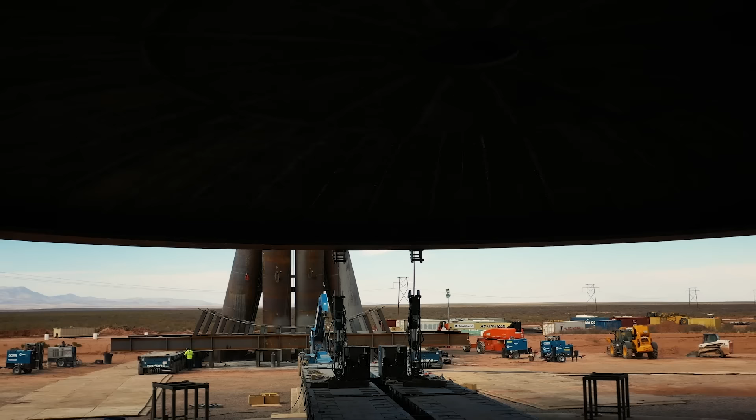In the middle of a global pandemic, a ragtag group of welders, heavy machine operators, and builders were brought together. They were given plans for a mysterious structure. With little information on what exactly they were building, their only clue was scrawled across the top of their plans: SpinLaunch, a space catapult. In this exclusive, behind-the-scenes documentary, I talked to the people behind this new innovative company.

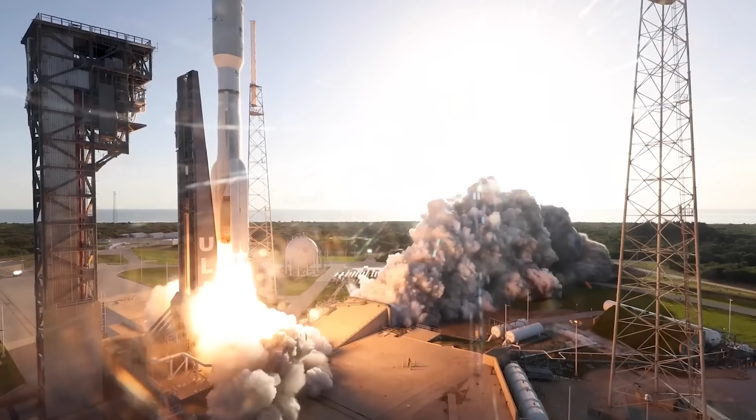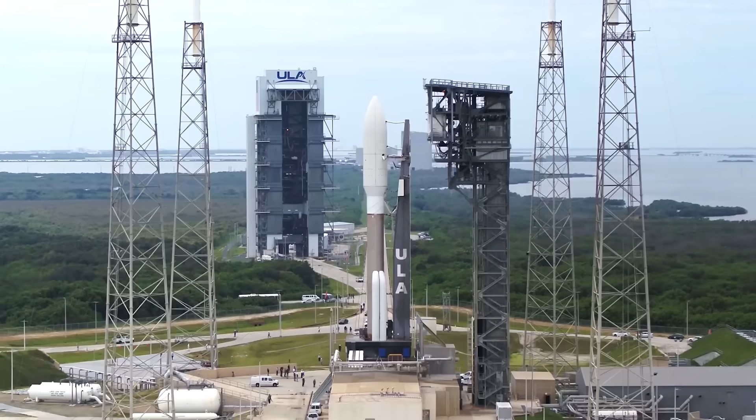SpinLaunch is attempting to subvert a problem that plagues the space industry: the rocket equation. The rocket equation has been the tyrant engineers have feuded with from the dawn of the space age, a simple equation that describes how much fuel a rocket needs to carry a payload to its destination. The tyranny of this equation is that the fuel needed to deliver that payload is a payload itself, a compounding problem that makes rockets more fuel than rocket. Typical rockets are more than 90% fuel.

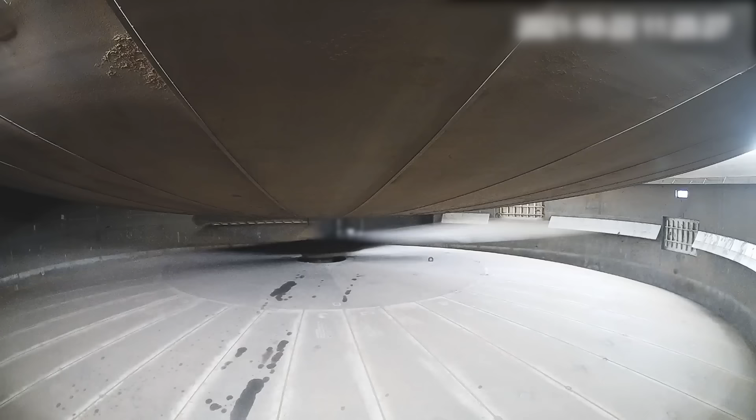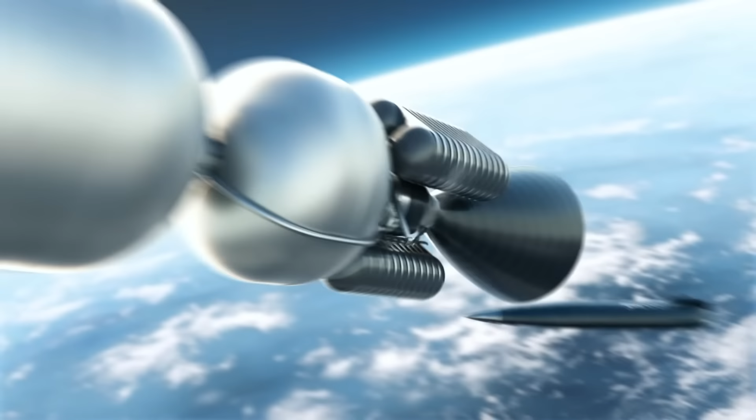SpinLaunch is trying to change that paradigm by imparting as much velocity as possible to the payload on the ground, eliminating as much fuel as possible from the rocket's weight, while greatly reducing the size and complexity of the non-reusable components. Their plan: to spin a small rocket in a centrifugal mass accelerator under a vacuum up to an astonishing speed before releasing it, punching through the thickest layers of our atmosphere at hypersonic speeds, gaining 61 kilometers of altitude off nothing but pure kinetic energy, before splitting its fairings and unveiling a substantially miniaturized two-stage rocket to continue its journey into orbit. You may question the numbers here, but this isn't the first time this has been done.

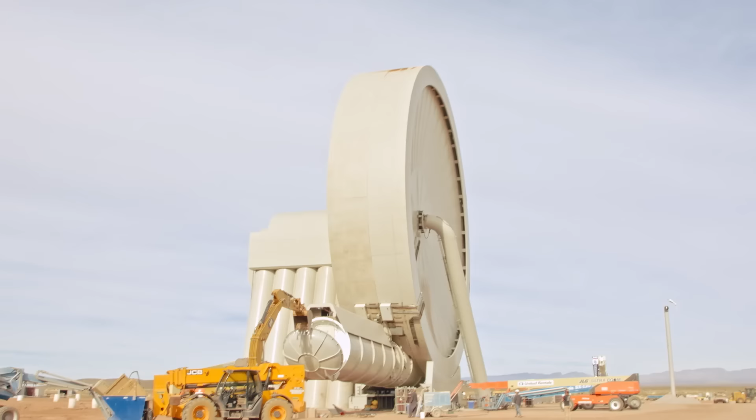Project HARP, standing for High Altitude Research Project, managed to get a projectile to 180 kilometers of altitude with a high-powered gun. They achieved a muzzle velocity nearly identical to SpinLaunch's planned launch velocity. However, scaling a kinetic energy launch system up to launch a 10-ton projectile needs SpinLaunch's technology.

Of course, all of this is easier said than done. The challenge facing SpinLaunch's engineers is immense. This endeavor demands several new key enabling technologies.

So in terms of key enabling technologies, carbon fiber certainly takes center stage. That's David Wrenn, SpinLaunch's VP of Technology. I spoke with him on the SpinLaunch factory floor about the carbon fiber reinforced plastic that they are using for their tether. In terms of its strength to weight ratio, it's essentially unmatched by any other material on Earth. And the amazing thing is that it's actually available in industrial quantities now, and the engineering tools and simulation methods exist to really quickly iterate and understand what a composite structure will do. And then we have structures and test rigs like this to validate in the real world that the components actually fail at the expected loads.

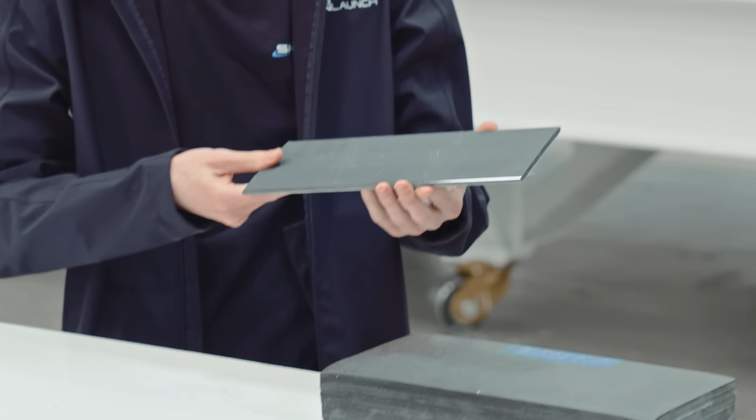So just to give you a sense of the strength of carbon fiber, this is a pultrusion. This is made by taking carbon fiber tow, essentially spools of carbon fiber, and pulling it through a heated die with a resin bath. Basically, the resin gets impregnated into the carbon fiber tow as it gets pulled through the heated die. And you get these really nice, highly unidirectional structures that can be used for spin launch. And so as small as this cross section is, I think this is about 1/8 of an inch thick and only a few inches wide. This can do just under 250,000 pounds of total load capacity, which is really, really impressive.

I'm trying to convert it to metric in my head. It's like, oh yeah, no, that's a lot. Yeah, I think it's like 1,000,000 newtons or something like that. So, and then if you look at, this is where it gets interesting: can you build really thick cross sections of carbon fiber? You can see there's really great—

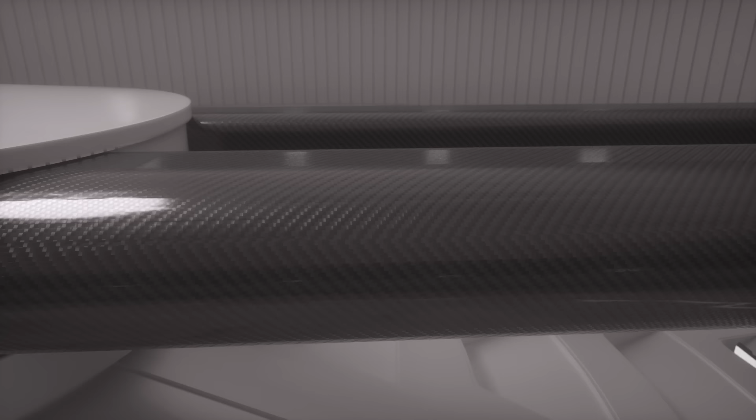Is this pultruded as well? So this is not pultruded. This is laid up and then it's cured in an autoclave. So this is essentially a subsection of the laminate that you would see at the root of the tether on the suborbital system. So this is not unidirectional or pultruded. But if you were to take this same cross section here and basically make this a pultruded fiber, if you just stack up multiple pultruded sections, you would get about 9 million pounds of total load capacity through this cross section. So it's impressively strong for what it is.

I mean, it's heavier than you'd expect. Like holding a carbon fiber brick. I don't think I've ever seen an application where that much carbon fiber has been laid up. It's rare to see carbon fiber this thick. Yeah, it really is rare.

The final fully scaled tether for SpinLaunch's orbital system is likely going to be the single strongest tensile structure on Earth. Let's do the math on that. SpinLaunch aims to yeet its aeroshell containing the miniaturized rocket system at about Mach 6. That's roughly 2 kilometers per second.

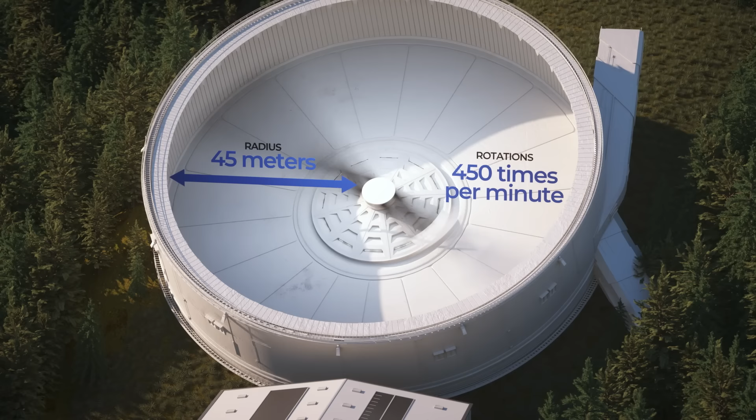With a radius of 45 meters, the tether will need to spin 450 times per minute to attain that velocity. At that rate, the G-loading on the tether will be 10,000 Gs, meaning this aeroshell is going to exert a force 10,000 times greater than its weight due to gravity.

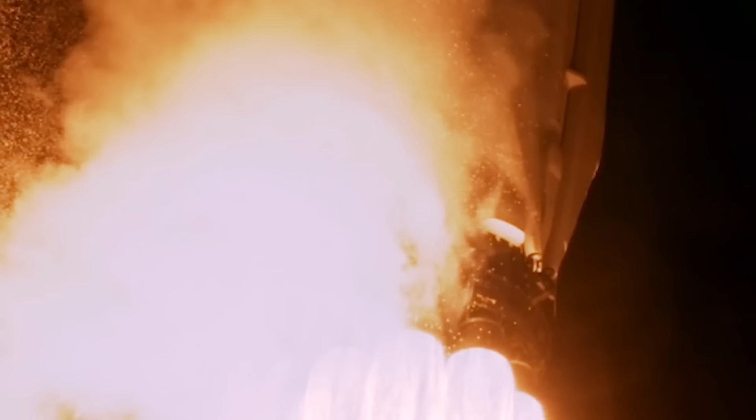The aeroshell with the payload and rocket is going to weigh approximately 10 metric tons. So that means the tether at the tip needs to support 100,000 metric tons, or 100 million kilograms. To put that in context, a fully loaded Falcon 9 weighs about 0.55 million kilograms, so this tether needs to support the equivalent weight of 182 Falcon 9s.

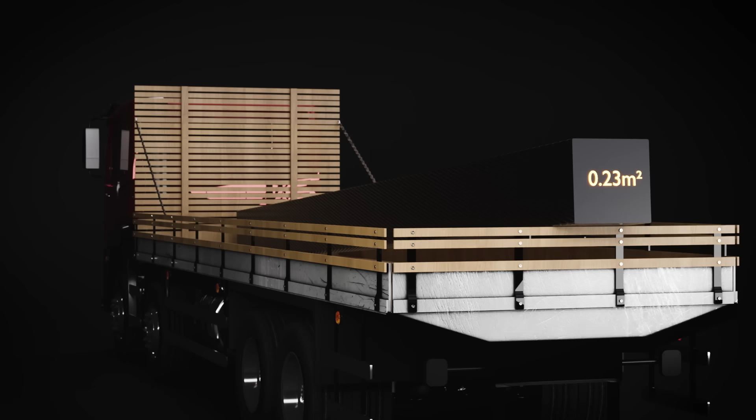This requires a hefty piece of carbon composite with a cross-sectional area of at least 0.23 meters squared. That explains the brick of carbon fiber we saw. That brick could support 4.1 million kilograms, so the full-scale tether will need to be 24.4 times this size at its tip, but that's just the tip.

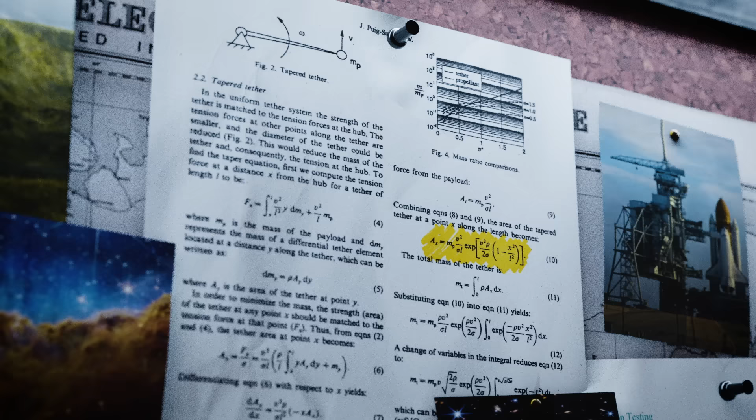This equation tells us why carbon fiber is so vital to this endeavor, because each section of the tether has to support the section above it. Its strength-to-weight ratio needs to be exceptional.

If we calculate the tether area near the hub for the same carbon composite, the tether only needs to increase in area by 2.5 times, to about 0.56 meters squared. We would, of course, need to add a safety factor of at least 1.5, increasing these dimensions by 50%.

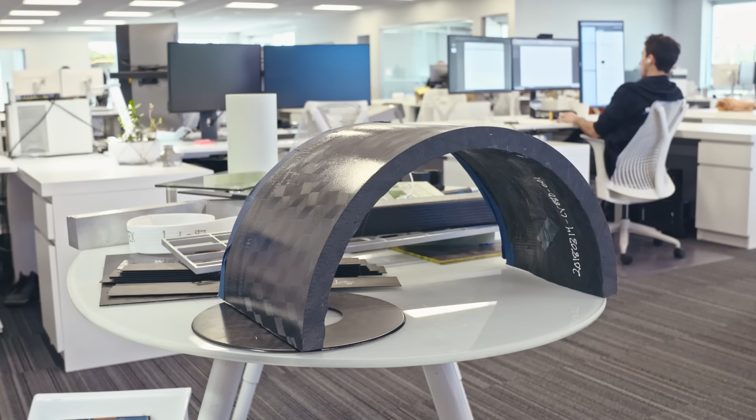That design is perfectly feasible and is reflected in SpinLaunch's renders. We even have the manufacturing skills necessary to build even larger composite structures thanks to the wind industry.

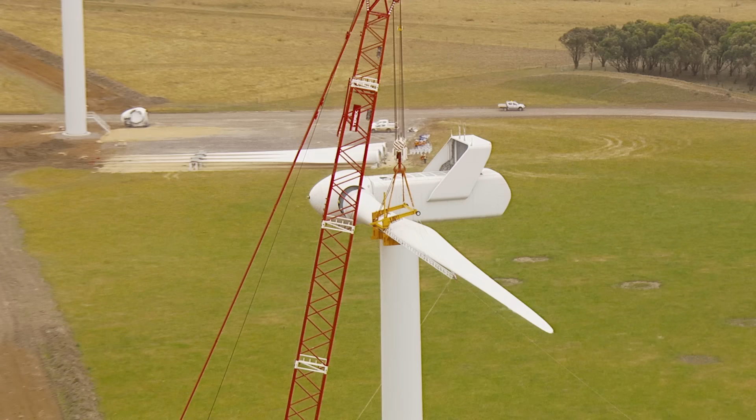So, this is all well and good, but spinning a carbon fiber composite up to Mach 6 isn't possible in air. The aerodynamic heating would destroy it. So, to solve this issue, SpinLaunch created a massive vacuum chamber around its tether.

There's a bunch of things at the beginning of SpinLaunch that were non-starters for a lot of people, like even just building the large diameter vacuum chamber. People were telling us the one behind me here would cost tens of millions of dollars to build, and we ended up doing it. We had this really scrappy, lean mindset, and we ended up doing it for less than a couple million dollars with about 10 people.

Which is unheard of. There's some large industrial vacuum chambers out there, but quite a few of the really large chambers in the world are for aerospace applications, and so they're achieving extremely high levels of not only vacuum but cleanliness. The cost is proportional to that, and it's kind of exponential.

They're achieving vacuums that are on the order of 10 to the negative 8 millibar or torr. Typically we're operating at about 1 million times worse than that. SpinLaunch is breaking new ground with this kind of vacuum chamber.

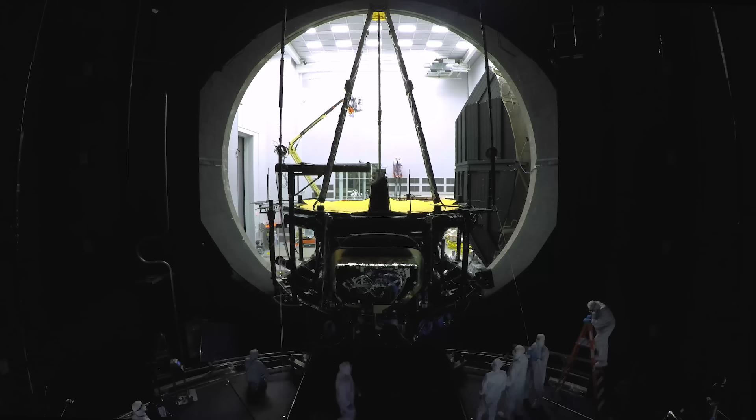Typical large volume vacuum chambers, like the world's largest one at Space Power Facility in Sandusky, Ohio, are designed to simulate the vacuum of space. Those require an extremely low pressure vacuum with tight tolerances and control of contamination. They even need specialized tools like lamps to simulate the radiation and heat emanating from the sun, and cryogenic cooling to simulate the cold of space.

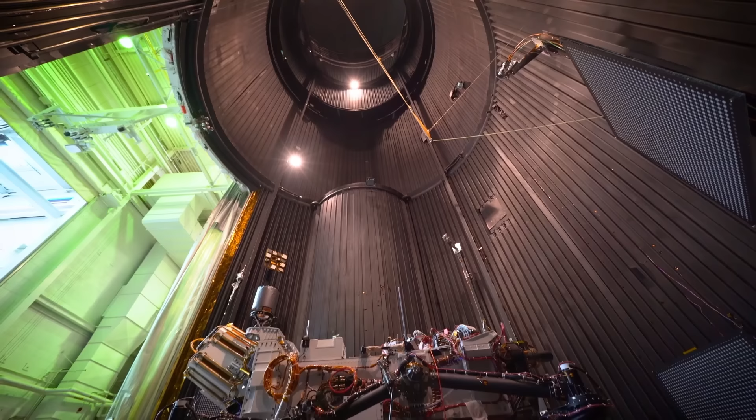The people that built these facilities are the industrial experts SpinLaunch had to draw from, and most thought they would never be able to build a vacuum chamber this large on their budget. But SpinLaunch does have some things on their side.

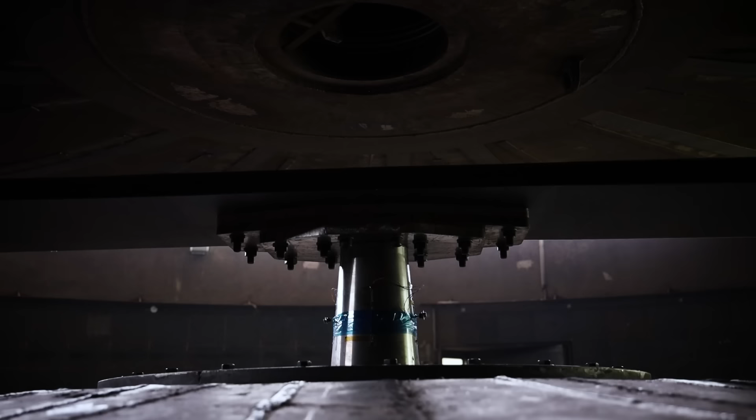They didn't need that extreme of a vacuum, as their goal is not to simulate the vacuum of space. Their goal is to minimize drag and the power required to overcome it, minimize the aerodynamic heating that would destroy the tether, and eliminate all those pesky aerodynamic effects like flutter.

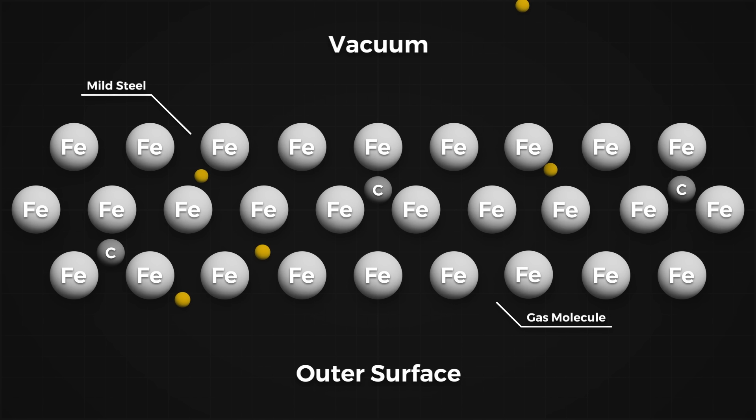That means SpinLaunch could use cheaper materials like mild steel, where ultra-high vacuum chambers need more expensive specialized processed materials to avoid outgassing, where gases within the metal in the form of oxides or simply dissolved within the metal are released into the vacuum. It also makes the process of drawing a vacuum much easier.

Drawing a vacuum isn't as simple as just turning on a pump and leaving it on long enough. The more air you draw out, the harder it becomes, as you are not only working against a continually growing pressure gradient, but statistical probability.

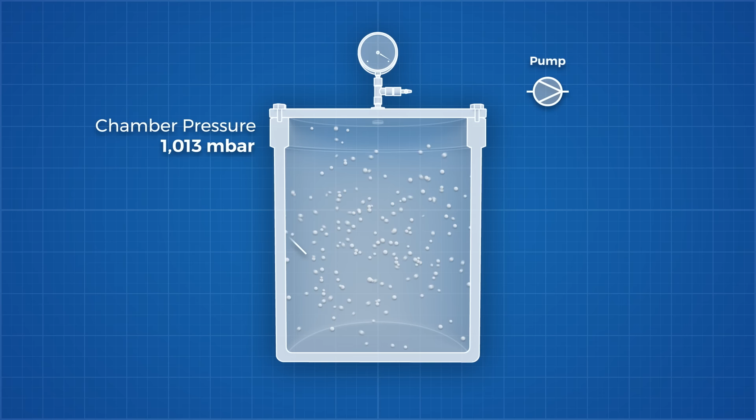The first stage of drawing a vacuum is to remove the bulk gas. At this stage, the gas is a viscous fluid, and the molecules within the chamber interact with each other often.

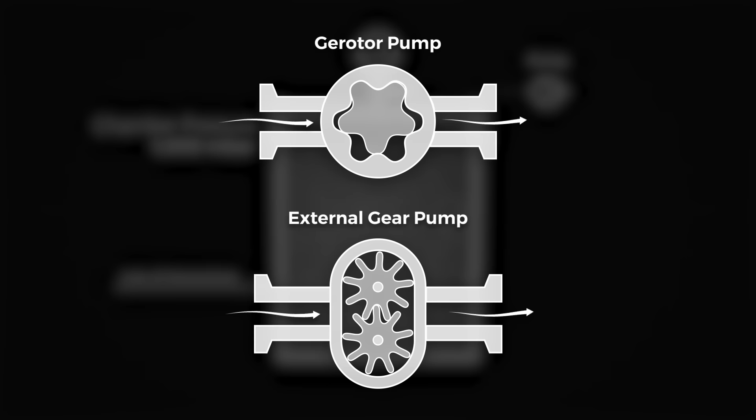We can use traditional fluid flow pumps, like a positive displacement pump, that mechanically move molecules out of the chamber, and higher pressure air at the back forces more air to fill the space created, allowing more to be pumped out. But as gas is removed, the distance between molecules increases. This is called the mean free path, the distance a molecule can travel without colliding with another.

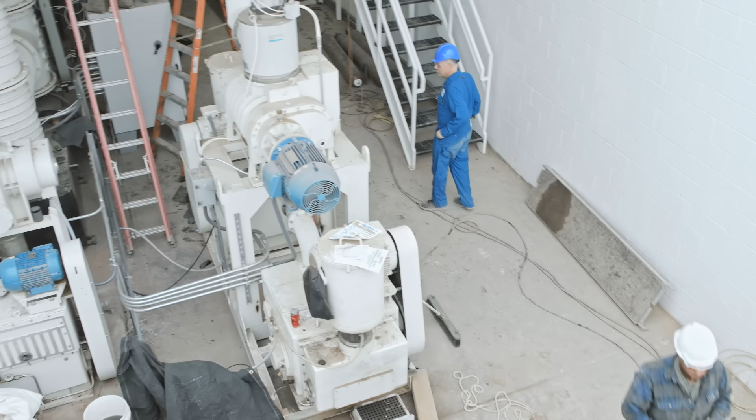Pressure is really just molecules colliding, and as collisions become more infrequent, the pressure gradients needed to achieve equilibrium begin to vanish. It takes longer and longer for equilibrium to be established, and the rate the pump can remove molecules lowers, as there are simply fewer and fewer molecules near the pump to remove.

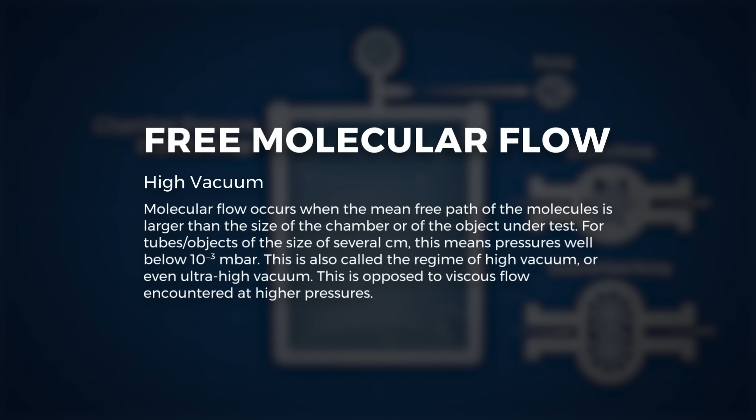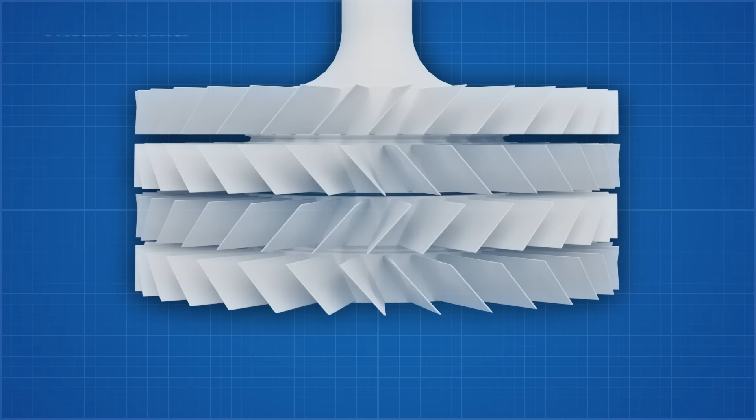At some point, viscous flow stops entirely, and we enter a flow regime called molecular flow, where the distance between collisions is larger than the internal dimensions of the vacuum chamber, meaning molecules are statistically more likely to just bounce around inside with nothing forcing them towards the exit. At this stage, it's impossible to actively pump molecules out. The pumps needed act like a Venus flytrap, waiting for a molecule to enter, then preventing it from returning to the original chamber.

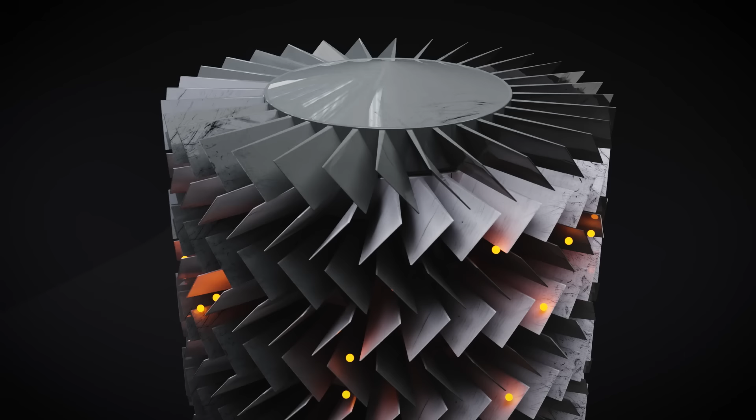Turbomolecular pumps are basically multiple levels of turbines that knock molecules in one direction and prevent them from traveling backwards. These pumps require insane rotation speeds, anywhere from 36,000 RPM to 72,000 RPM, and need incredibly tight tolerances too. They are trying to pump individual molecules after all, so these kinds of pumps are expensive.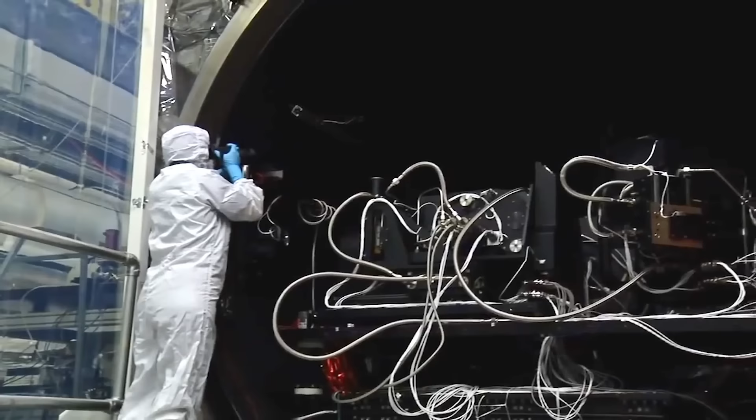All the while, outgassing and other leaks are actively working against a game of pure chance. Creating a high vacuum requires extreme precision in manufacturing and design.

SpinLaunch didn't need any of this. Mark Sipperly, the director of engineering at SpinLaunch, walked me through the vacuum pump station at the New Mexico site.

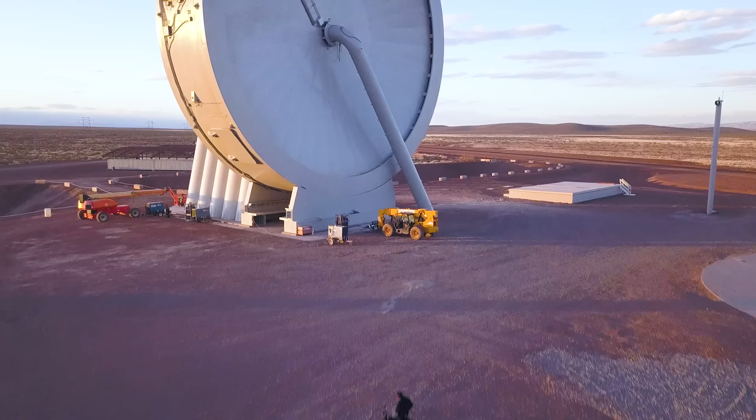Here in the vacuum plant, the most familiar thing would be the tube that came out of the chamber and then runs underground—this is the manifold. So this is the very end of it. Off of this vacuum manifold, we then have a series of 3 different types of pumps.

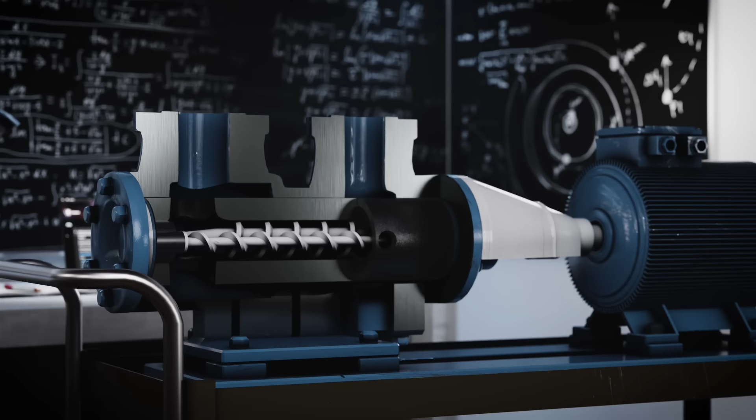Up on top, we first have roughing pumps, which pull the atmosphere from 1 atmosphere down to about 30 millibar. Those are dry screw pumps. They're essentially like overlapping lobes—it's one form of a supercharger.

Then the next stage is this roots pump, which is like another shape of a supercharger—rotating twin screw pumps. That kicks on at about 30 millibar, so it's mostly only effective at 30 millibar and below. But each pump exhausts into a pump that's a slightly higher pressure. So this roots pump only works at 30 millibar and below, but it can't exhaust all the way out to 1 atmosphere, so it's backed by another piston pump.

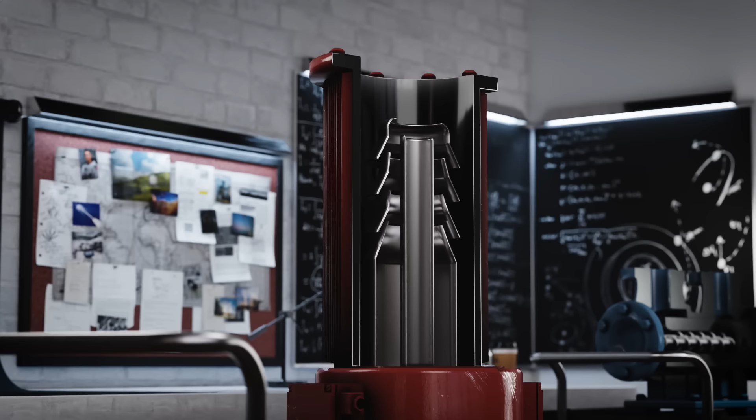Once we get down below 1 millibar, we turn on these vapor diffusion pumps, which are really only effective at very low pressure—those work like oil jets. You vaporize oil, shoot it down a series of channels, and it grabs onto the air molecules, runs them down a series of tubes, and then you have cooling loops that condense out the oil. The air progressively makes its way through a long path, and eventually gets to a roots pump, which grabs onto it, then goes to a piston pump, and then all the way out.

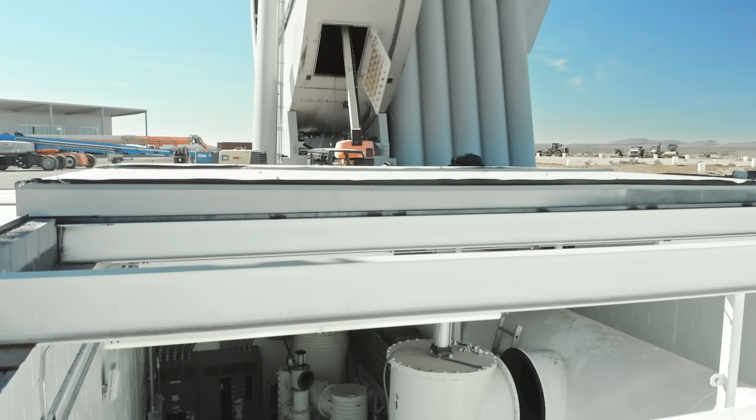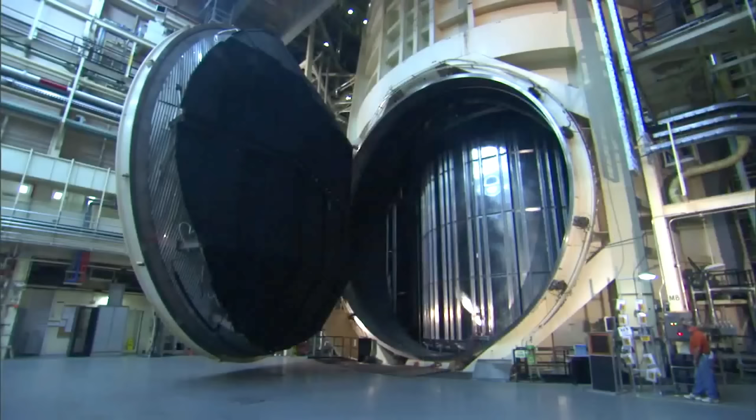We talked before about how vacuum may not be the best description, because most people think of vacuum as a hard vacuum, in torr, like e to the -7 torr—6 zeros and then the number. That's true vacuum, that's hard vacuum, that's where you test electrical propulsion systems and high-end space features.

That is nowhere near the atmosphere that we need, and that vacuum is really expensive to get to, and you have to follow a lot of stringent rules—you can't use steels, you have to use aluminums or thin coatings. Even putting your fingerprint in a vacuum that low would take weeks to boil off.

We only require the equivalent of like e to the -3 torr, so 0.01 millibar or 0.1 millibar. Today we're going to be running it at like 1 millibar because we only pull the vacuum that we need, because vacuum is expensive. It's closer to describe it as a low atmospheric chamber than a vacuum chamber specifically.

This is another one of those technical issues that the internet made a big deal out of without fully understanding what SpinLaunch actually needed out of the vacuum chamber.

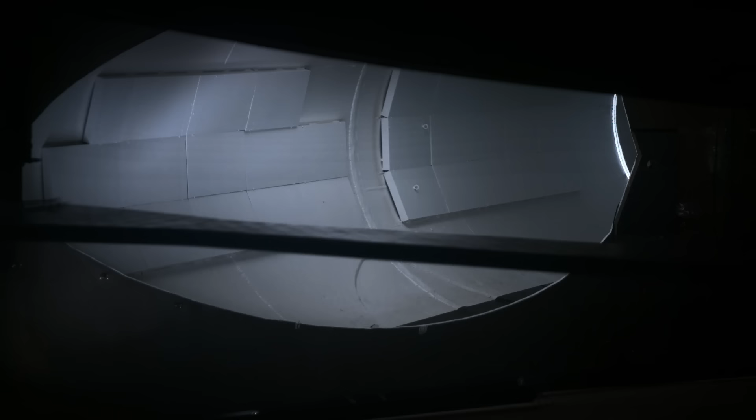One of the other primary concerns expressed on the internet was the tricky and unique problem of a vehicle traveling at hypersonic speeds from a vacuum into a thick sea-level atmosphere. To begin with, we need to prevent air from rushing into the vacuum chamber once the vehicle is released. SpinLaunch is aiming to be a high-frequency launch system, capable of launching multiple satellites per day, holding the vacuum between launches to decrease energy and time costs. However, the primary concern is the disastrous effects that air would have as it meets the tether spinning at hypersonic speeds.

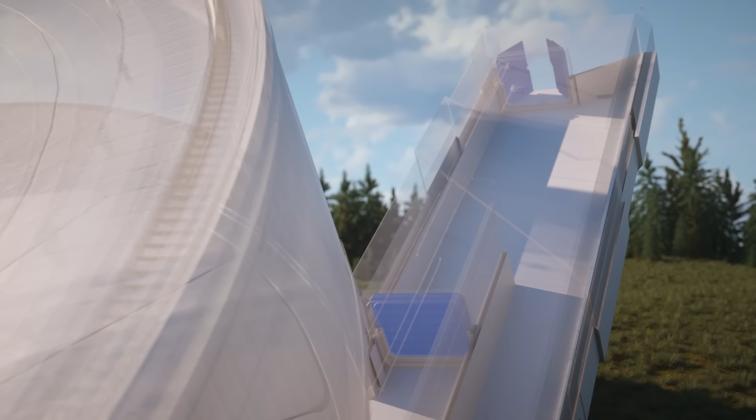This would be an incredibly expensive single-shot system if this was allowed to happen. To solve this problem, SpinLaunch needed a way of sealing the chamber extremely quickly after launch. Inside this long tube attached to the vacuum chamber is a double-door airlock with doors on either end of the tube. This tube is also under vacuum during spin-up. As the vehicle is released, using a release mechanism that SpinLaunch kept hidden from our cameras throughout the shoot, it passes into the exit tunnel, where the first door rapidly closes behind it. As this first door is closing, the second door will begin to open. The atmosphere will begin rushing into the tube and give the Aeroshell its first taste of the hypersonic flight regime it will be flying in.

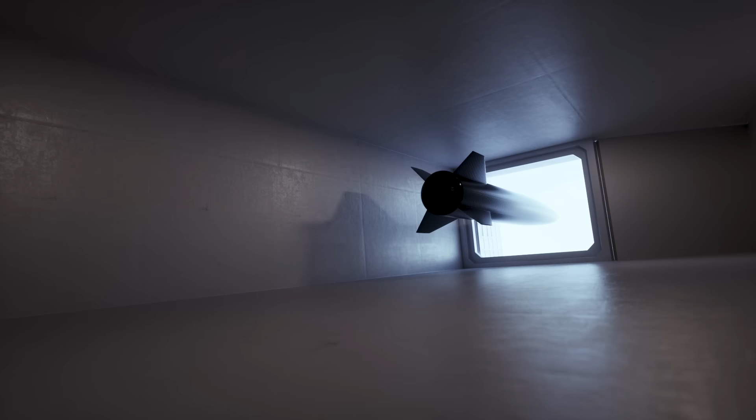The first and second door need to close quickly enough to prevent air from entering the vacuum chamber. This is not an easy problem. Millisecond delays that may seem trivial in most cases start to mount up when the vehicle travels this quickly. The time it takes for an electrical signal to propagate, the time it takes to overcome the inertia of the door, the time it takes for a proper seal to form. All these problems become matters of survival at these speeds.

Once again, SpinLaunch are keeping their cards close to their chests on this one, but they did give me a demonstration of the door closing in their factory and engineering hub in Long Beach, California.

Well, it's moving really fast, and so when the... without specifying, you can do a countdown. Yep, so whenever you're ready for a countdown, just let me know. Basically, what's going to happen is this is going to be filled with, for lack of a better word, like a black door, which you'll see that you can pass through with a vehicle, and then in an instant it's going to be closed. It's like faster than the blink of an eye. You'll see a little bit of settling after it closes, but it's basically 95% closed within 30 milliseconds. Oh wow, okay.

Closing airlock in 5, 4, 3, 2, 1.

It's pretty fast. Yeah, that's not what I was expecting. Yeah, it's fast. So it actually closes, it's actually hinged. There's a pivot. Yeah, I wasn't sure if it was going to be a sliding thing, but the hinged one makes sense as well. That wasn't what I was expecting. So it's 100% reusable. Basically, you can set that back up again and do it again and again and again. So that's a key aspect of it, is that you don't have any major consumables in the process. That's cool. Yeah, it's fast. Visceral. All right, I don't know. It's a door closing, I don't know what to ask.

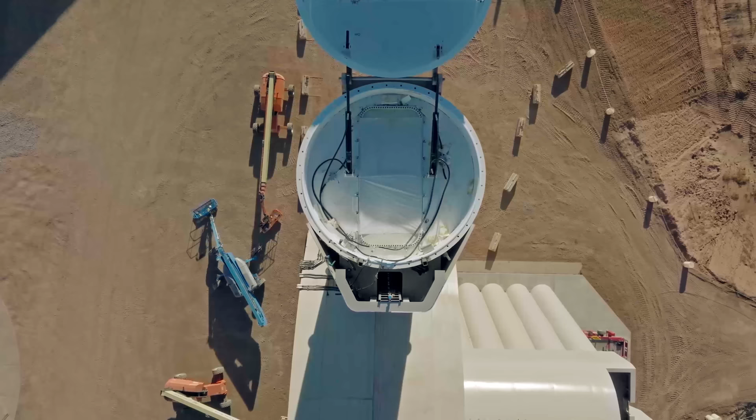We see viability there. In SpinLaunch's public videos, the secondary airlock has simply been sheets of mylar.

This is one of the few problems that becomes easier as the launcher scales. As the exit tunnel grows in length, it will take air longer to reach the door at the base of the exit tunnel. SpinLaunch have only just begun these 1/3 scale tests, with their fastest launch to date at 1.6 Mach, slowly ramping up the speed of launch as they test their systems. This prototype launcher features some other simplifications compared to their final planned configuration.

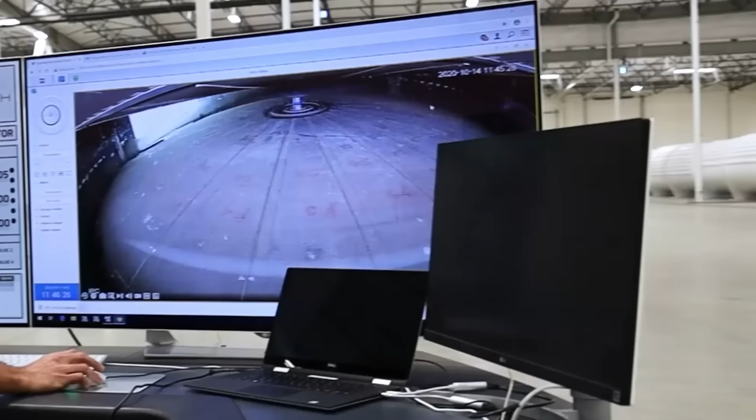One of the most obvious problems to tackle is the issue of vibration. When a spinning object's weight is not evenly distributed, it will vibrate. This is how rumble feedback works in gaming controllers, a simple electric motor with an uneven weight attached. However, with a structure as large as SpinLaunch's tether, spinning several times per second, any imbalance could shake the entire structure to the ground. This is a major problem, because, by design, the tether releases a 10-ton weight right at its maximum velocity. SpinLaunch needs a way to balance the tether after launch.

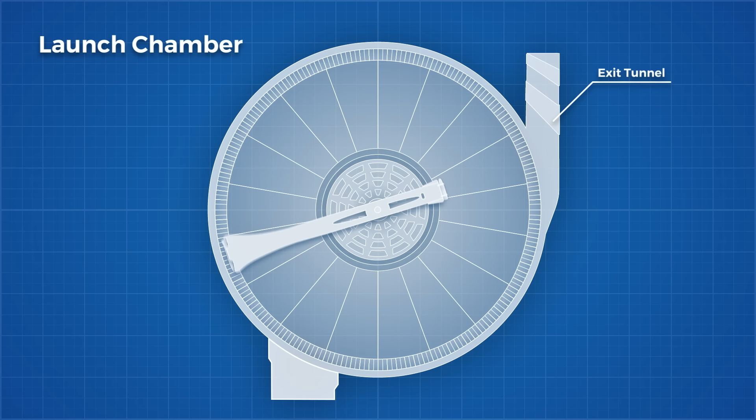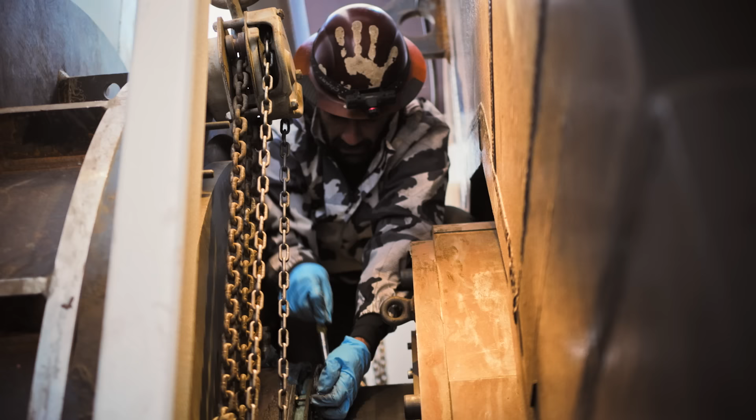There is a very simple solution to this problem though: release a balanced weight from the other side of the arm at the same time. Right now, they are simply releasing a counterweight that slams into an armored section of the vacuum chamber. We saw one of these counterweights being manufactured out of fiberglass in the Long Beach factory. However, over the long term, having to clean up the mess this creates after each and every launch is far from ideal. The ideal solution would be to release a counterweight in the form of another launch vehicle after a single half rotation of the tether. The oil-filled journal bearing the massive axle sits upon should be able to absorb the force of this imbalance over a period of time this short.

The next issue we need to concern ourselves with is the aeroshell punching into the atmosphere at Mach 6. This, again, is a fairly unique problem. Typically, weight is a restraining factor in aerospace, but for SpinLaunch, the energy required to spin the aeroshell up to speed is actually rather trivial.

It's on the order, I like to use the analogy of like a Tesla, right? So the Tesla Model S Plaid is about 0.7 megawatts. So on the low end, it's about 100 Teslas, but it really comes down. Is that for the full scale? Yeah, for the full scale, yeah.

For the orbital system, you're talking about, on the low end, on the very low end, it's probably about 65 to 70 megawatts. And again, that really depends on where you end up with the final orbital tether, whether or not what safety factor you operate with, what tether strength you end up with, your effective tether cross-sectional strength. That all feeds back into itself, and then you have to kind of scale it accordingly. I would say, really conservatively, if you wanted to spin up really fast, then you're talking about a higher power demand. So whether you want to spin up in an hour or 2 hours, proportionally makes a difference of how much power that you need.

But on the high end, you're talking about maybe 150 megawatts of power, which is, I don't know, maybe in layman terms it sounds significant, but there's motor catalogs where you purchase the motor that has that capacity, right? And so this is industrial scale hardware, and certainly mostly off the shelf.

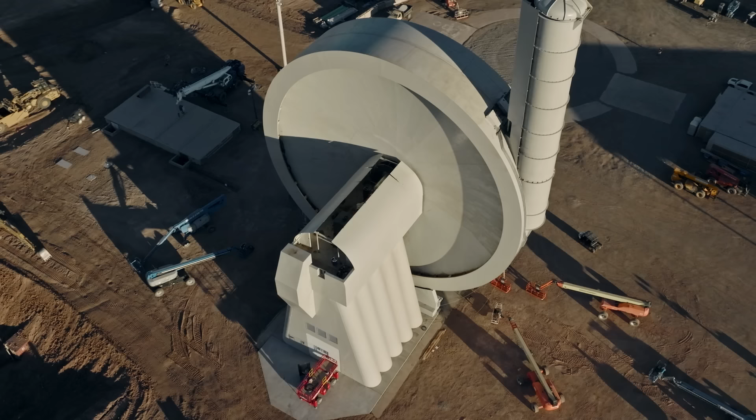SpinLaunch claims their total energy demand per spin-up is about 100 megawatt hours. The cost per kilowatt hour for industrial facilities is about 6 cents. So that's a cost of $6,000 in electricity cost. That's insanely cheap. To put that into perspective, 100 megawatt hours is equivalent to about 9,600 litres of kerosene, about 8 tons of fuel. For reference, the Electron rocket from New Zealand's small satellite launching company Rocket Lab, capable of launching a similar sized satellite, weighs a total of 12.5 tons.

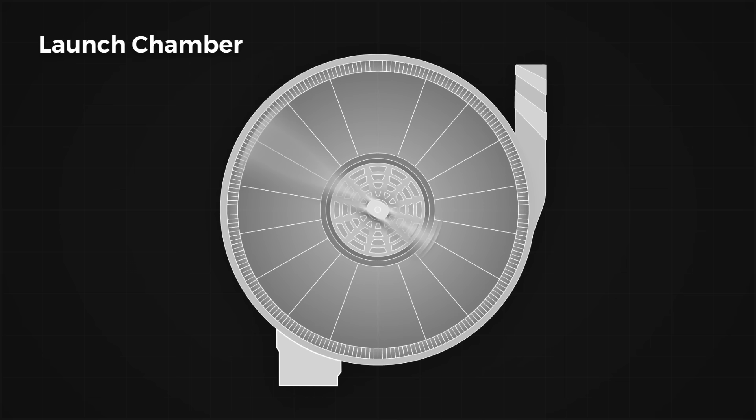The vast majority of that weight being its own fuel and oxidizer. SpinLaunch claims their rockets will need to carry about 30% of the fuel and oxidizer compared to their competitors. They are essentially replacing the first stage of a traditional rocket with an easily reusable kinetic launch system. SpinLaunch will also be able to recapture a good deal of the electricity stored as kinetic energy in the tether using regenerative braking, even further reducing their electricity bill.

Because of all this, the limiting factor for SpinLaunch in terms of weight is actually the weight the tether can support. As a result, it makes sense to maximize the density of the aeroshell, because it affects a variable that will drastically improve its ability to punch through the atmosphere: its ballistic coefficient. Ballistic coefficient is essentially an object's ability to resist air resistance.

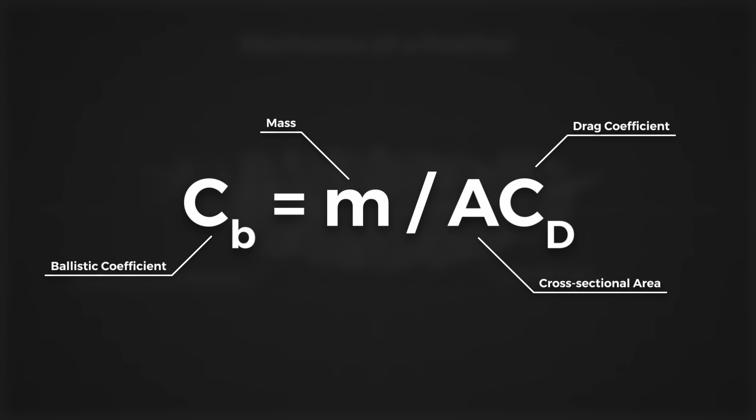Think about how hard it is to throw a feather. No matter how hard you throw it, it's not going to go very far. It's got a large surface area for air resistance to act upon relative to its weight. That's a low ballistic coefficient. Ballistic coefficient is found by dividing the mass of the projectile by the drag coefficient multiplied by the cross-sectional area. So SpinLaunch effectively wants to maximize the mass relative to the cross-sectional area.

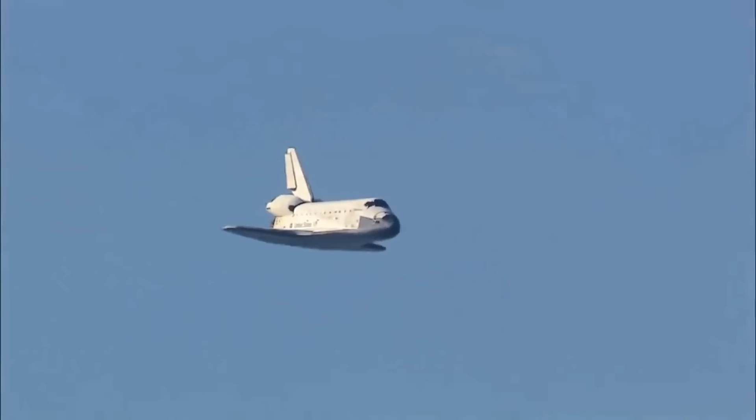This is obviously not typical for aerospace vehicles. If you look at re-entry capsules, whether it's something like the Stardust return capsule at really high velocity, or re-entry from orbit for a manned capsule like the space shuttle, they're typically using thermal protection systems that are extremely low density, on the order of less than 300 kilograms per cubic meter. It's basically foam. And so typically that means you're making significant compromises, like the material often being brittle or prone to fracture, or really expensive, or getting worn away, and then you have to replace the tiles, kind of in the infamous case of the space shuttle.

So what we're dealing with is, on the tip of the vehicle, you have materials like copper, which not only are significantly higher density—we're talking thousands of kilograms per cubic meter—but they also have really great thermal conductivity. So as you transition through the atmosphere, you have a high heat load, but then you're dumping that into heavy dense materials that have good thermal conductivity. This is one of those unintuitive consequences of this style of launch.

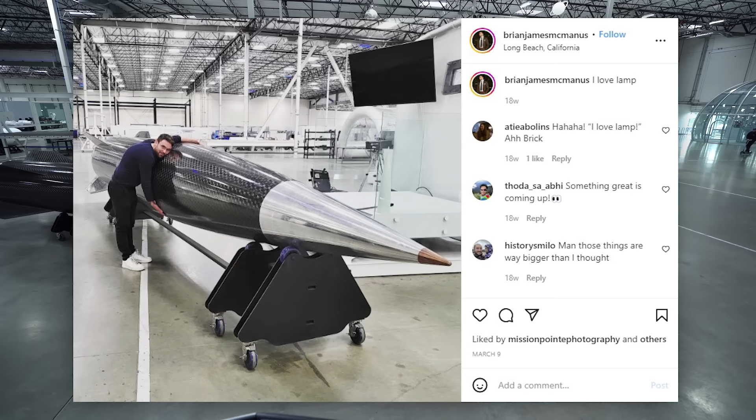When I first saw the full-scale aeroshell on the SpinLaunch factory floor, I first asked if I could ride it like a cowboy, but then immediately noticed the bimetallic nose cone. I knew from looking at it that it was made from copper and aluminium, and that struck me as extremely odd. Those metals would melt at the temperatures I associate with hypersonic speeds.

But because SpinLaunch launches at Mach 6, it actually transitions through the lower atmosphere rather quickly, and as a result the heat generated can simply be absorbed by these large heat sinks. Aluminium and copper's high thermal conductivity means the heat is distributed through the body of the aeroshell before it has a chance to damage the vehicle.

The hefty carbon fiber shell is also incredibly strong. SpinLaunch has already pulled their smaller scale aeroshells out of the ground, buried several feet deep from the force of impact, and reused them with minimal refurbishment. With a parachute, these aeroshells will be fully reusable with minimal maintenance, especially as they serve no function other than to protect the inner rocket stages. This isn't an intricate mechanical machine.

Launching from the ground at these speeds comes with advantages too. If we plot drag coefficient versus Mach number for a bullet-like projectile, something rather unintuitive occurs. The drag coefficient rises as you would expect until we hit Mach 1. At this point, it starts to fall as Mach numbers increase. This is the equation for drag: it's proportional to drag coefficient, air density, and velocity squared.

With drag coefficient being lower at hypersonic speeds, it actually makes some sense to punch through the thick lower atmosphere, where the high-density air causes drag to rise, as fast as possible. Deceleration is a function of time after all—meters per second squared, meters per second lost per second.

Let's calculate the dynamic pressure this drag would create at launch and the deceleration it would cause. The dynamic pressure is found by multiplying air density by the velocity squared and dividing by 2. At sea level, at Mach 6, the dynamic pressure will be about 2.6 megapascals. The final aeroshell is 1 meter in diameter and has a drag coefficient of about 0.1, which means the force applied to the aeroshell at launch will be 205 kilonewtons.

This sounds like a lot, but here's where ballistic coefficient comes in. The drag force is being applied to a 10-ton body moving at Mach 6. That's a lot of inertia. Force equals mass times acceleration, so acceleration equals force divided by mass. That means high mass equals less deceleration. In this case, deceleration due to drag will be about 19.8 meters per second squared at launch, but it will rapidly decrease as we move through thinner and thinner layers of the atmosphere and lose velocity.

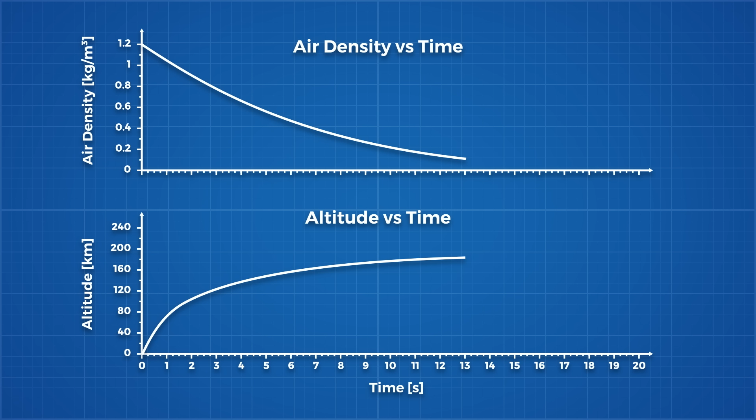With SpinLaunch's planned trajectory, we can plot the atmospheric density the aeroshell will encounter over time, halving in just 5 seconds and dropping to less than 10% of the original air density in 15 seconds, while gravity remains more or less constant at 9.8 meters per second squared. That means gravity losses form the majority of energy losses in our transition to orbit.

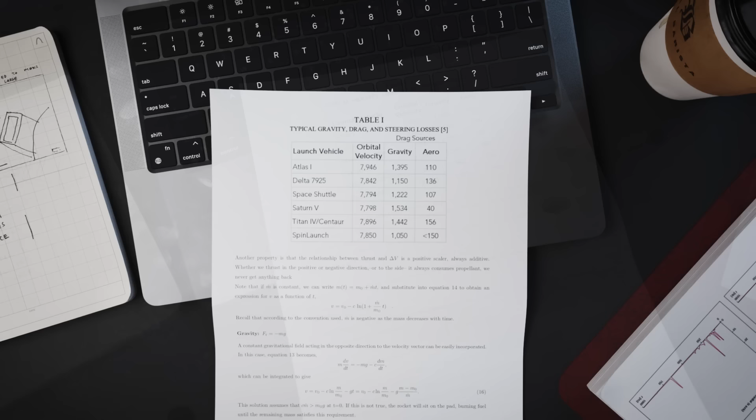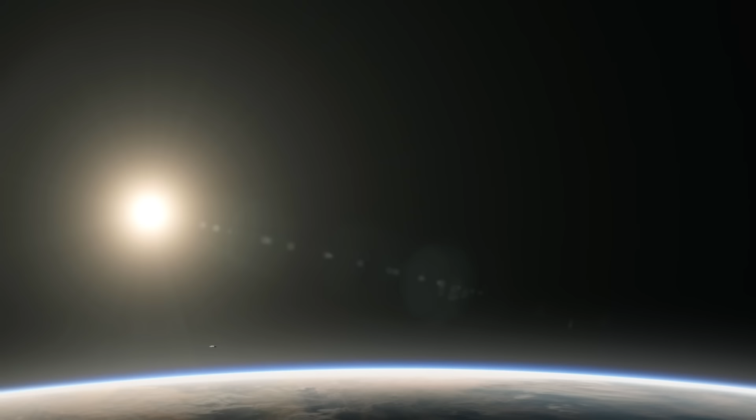However, now free from the mass of the aeroshell, the substantially miniaturized rocket needs only a fraction of the mass of fuel and oxidizer to rapidly accelerate the 200 kilogram satellite, the largest satellite the system can launch, through the thin atmosphere at this altitude.

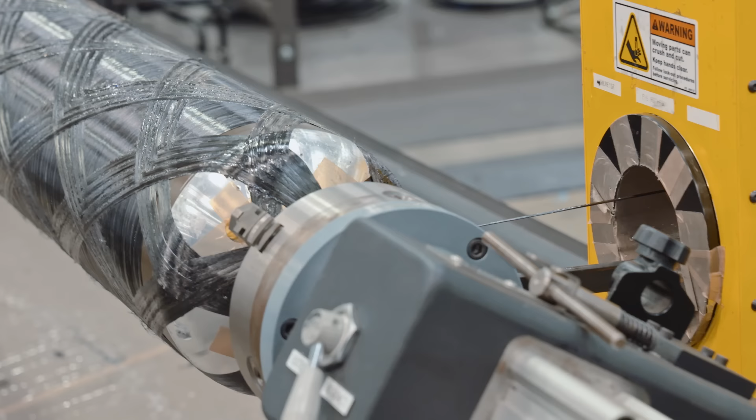The physics here absolutely check out, but whether the economics and cost of development will be viable is the big question to be answered. SpinLaunch has built a 1/3 scale prototype at a relatively low cost, but the hardest part of this technology is scale.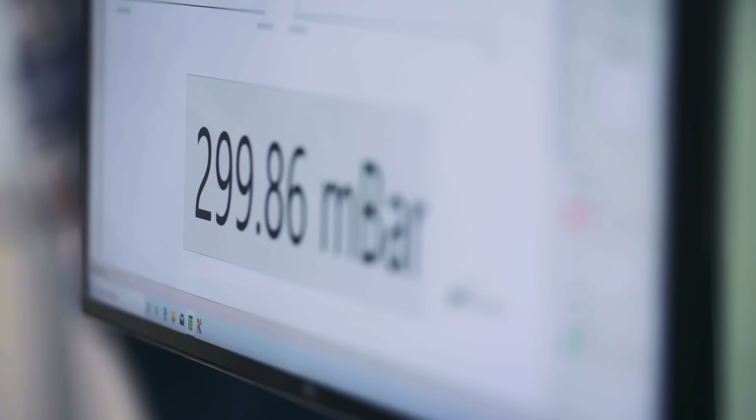They have reached 1.6 Mach thus far, have tested their satellite components at 10,000 G in their test facility in Long Beach, and are continually upping their test parameters, pushing further and further.

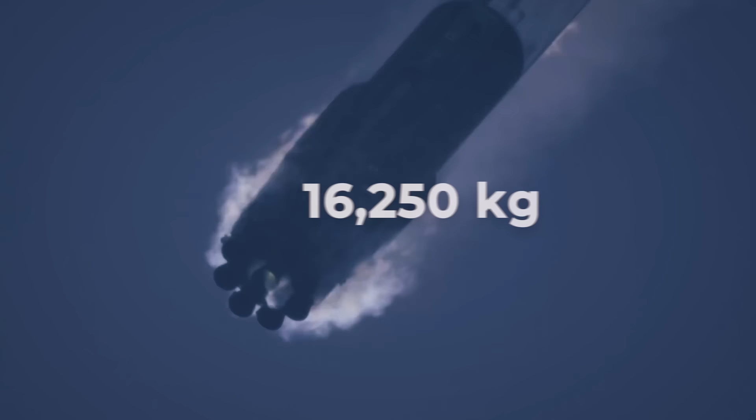A SpaceX launch to low Earth orbit costs about $67 million. The heaviest Falcon 9 payload to date has been 16,250 kilograms on a densely packed Starlink mission. That equates to a launch price of about $4,100 per kilogram.

However, small satellite launch companies like Rocket Lab, who offer greater control over orbit and launch schedules, charge about $15,000 to $25,000 per kilogram. Dollars per kilogram is not a perfect metric, but gives us some idea of the competition SpinLaunch is facing.

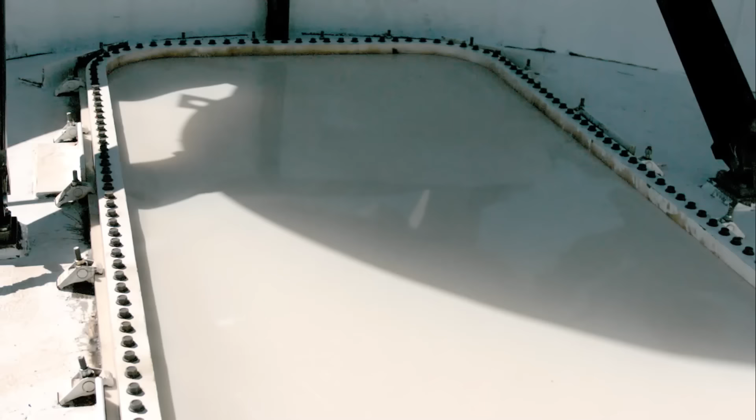SpinLaunch's main competitive advantage is in the decrease of expendable materials like fuel, while substantially miniaturizing rocket components. They also have huge potential to launch far more frequently than their competitors, helping the economies of scale to kick in. SpinLaunch claims to be targeting an ambitious per-launch price in the range of $500,000, placing them at $2,500 per kilogram.

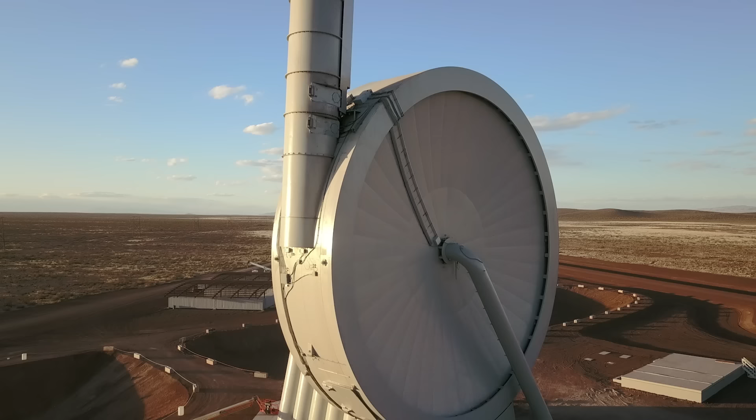In my time at SpinLaunch, talking to their engineers, it's clear they are excited and believe in this company. The basic napkin physics of SpinLaunch absolutely check out, and they are well on their way to solving the engineering challenges. But scaling up this monstrous engineering effort is going to require enormous amounts of investment, and SpinLaunch could not disclose the answer to many of my questions as they seek patents for their solutions.

I got little info on one of the most difficult parts of the launch system, the release mechanism for the aeroshell. Even the 3D models SpinLaunch provided for this video had the release mechanism removed, so we had to model our own along with the internal rocket structure.

The design of the satellites is another problem, due to the massive Gs the satellites have to survive. But G-hardening isn't as large an engineering challenge as the internet seems to think.

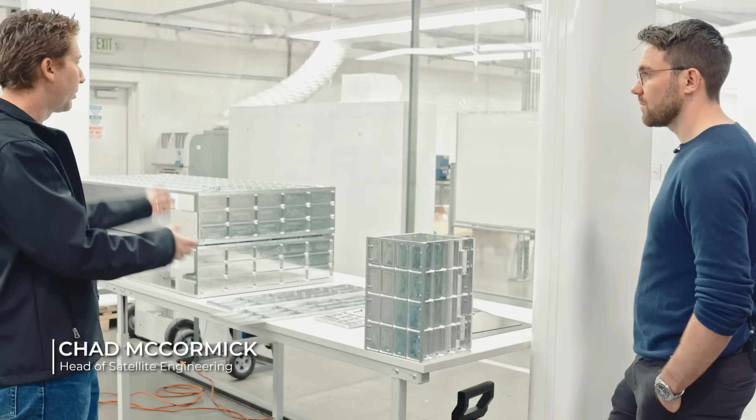The most difficult part, besides the structures, is also the reaction wheel. The reaction wheel generates momentum and basically steers the bus. It typically is a big mass that's cantilevered up at a certain angle, which is the one thing we don't like. You don't want a big mass sticking up on a cantilever.

This is what I assumed was going to be a difficult thing, because it inherently has to be fairly high mass to control the satellites. Right, and so instead of re-engineering the wheel itself and figuring out different ways to do that, we basically just took a clever way of deploying the wheel.

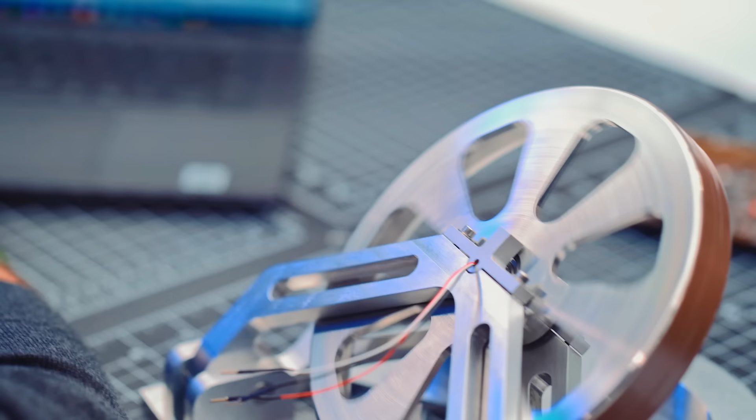We support the wheel in the flat orientation, so when it's spinning, it's well supported. The bearings are unloaded, so it can spin and do its thing. Then we deploy the wheel for when it actually needs to operate. So it's a simple solution for what could have been a really difficult problem.

And does the axis of the actual wheel cause any issues when it's being G-loaded? I imagine it's a fairly high weight to have on an axle. Yeah, so what we do is we unload the bearings, and as part of the deployment mechanism, we reload the wheel into the bearings. Oh, okay, so it's just taken off completely.

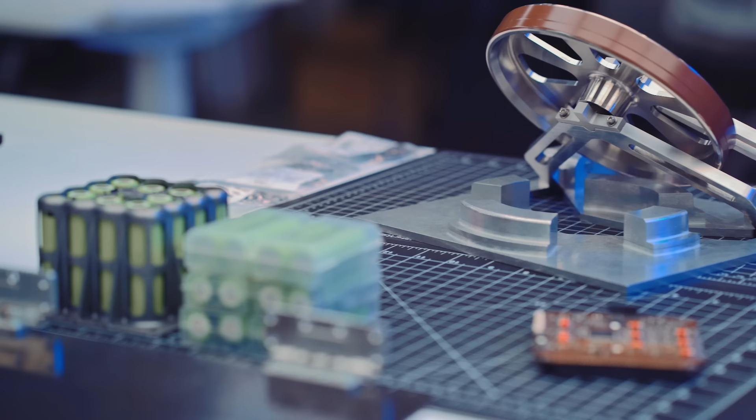Again, trying to make simple solutions for very difficult problems. Those are very simple answers. I figured the inertial wheels would be difficult, and then you just think about it, and it's actually a fairly easy thing to not deal with. You don't have to have it in the exact configuration when you launch. Same with the solar panels, you can have them loaded. So the problems aren't necessarily hard to deal with, it's just you have to think differently. It's not that these are difficult problems, we just have to change the way we think about designing satellites a little bit. It's not a lot.

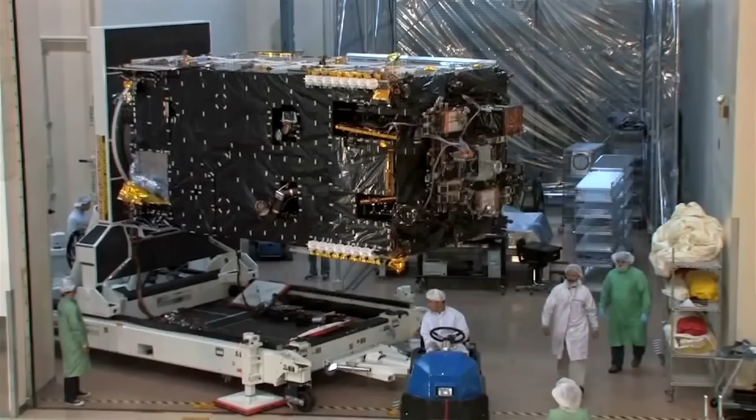The nice part is, too, that over the last 60 years, what people have been trying to do with satellites has actually helped us, because they want to reduce mass, they want to make things stronger. So every bit they're forcing them to deal with shock and vibe already helps us, and it already inherently starts to make them more G-hardened. Most components, we don't have to do anything to them. Maybe a little epoxy here.

But one of the most surprising events we had here amongst the entire team is we took a board that had a capacitor stuck up maybe a quarter of an inch. We all looked at it and thought, okay, that thing's just gonna fly off and hit the wall. We spun it and brought it back, and it just went burp, and that was it. We all were like, alright, our intuition is completely changing, and it's because it's so little mass and it's being held on by two pieces of steel. The amount of force that was really imparting on those two pieces of steel was relatively small, so it just bent over. We all kind of thought, oh yeah, after you think about it, it does make sense, it does survive. So our intuition is starting to grow about, yeah, this little connector sticking up really isn't that big of a deal. That has been, in a positive way, very surprising, which is great.

Gs can only create force where there is mass, and it turns out the satellite industry has been finding ways to reduce mass for decades. A simple aluminium can is capable of withstanding 10,000 Gs with a basic redesign of its structure. Minimizing weight located on unsupported surfaces lowers the mass available to be multiplied by the Gs, and some simple corrugation can help the aluminium absorb some of the loading without buckling.

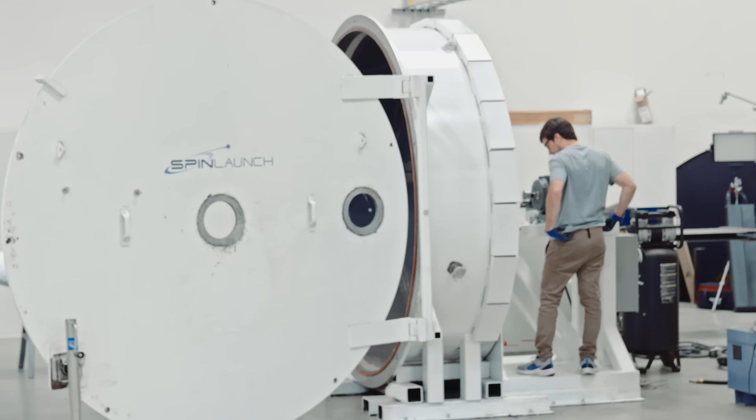We spun up an off-the-shelf star tracking camera using SpinLaunch's in-house centrifugal accelerator, which can already achieve 10,000 Gs, and the camera worked perfectly fine just moments later.

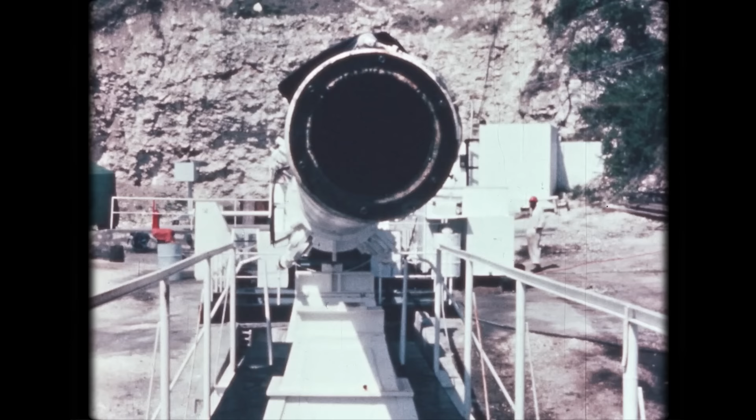This is a really interesting engineering challenge that I think the internet is giving a hard time for some bizarre reason, posing questions about basic physics calculations without actually doing the math and then saying it's impossible. Even missing the fact that kinetic energy launch systems have already reached beyond the Kármán line six decades ago.